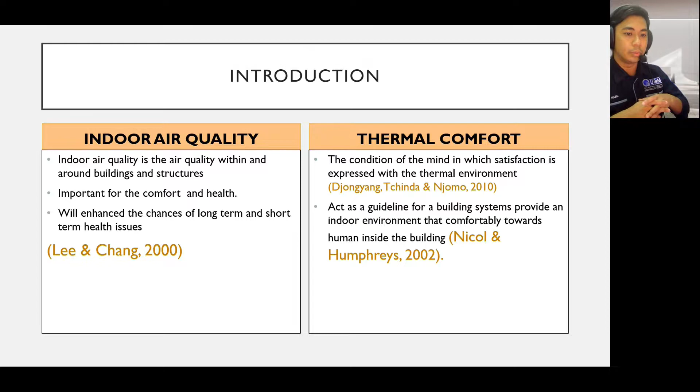The problem for the study is many researchers found that most people spend 90% of their time indoors. The World Health Organization, WHO, found that 3.8 million people die annually from illness attributable to indoor air pollution.

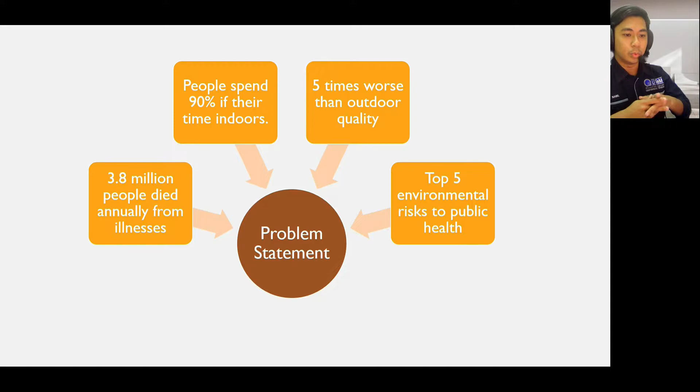The Environmental Protection Agency, EPA, also states that the levels of indoor air pollutants are often 2 to 5 times higher than outdoor levels, and in some cases can exceed 100 times the outdoor level of the same pollutant, and ranks indoor air quality as one of the top 5 environmental risks to public health.

These are the objectives for this research. The main objective for this study is to determine the indoor air pollutant concentration in lecturer rooms at the FTKMP building based on ICOP 2010, Industry Code of Practice on Indoor Air Quality 2010.

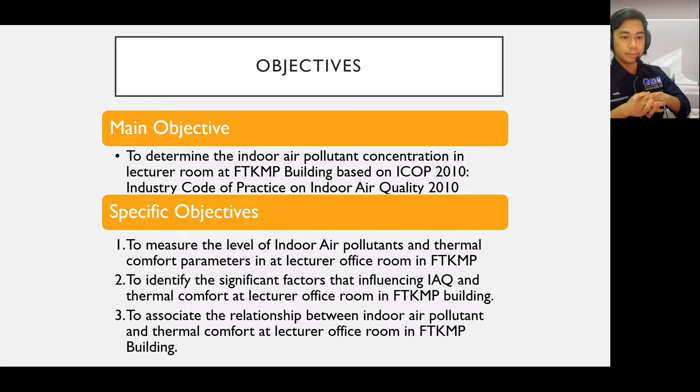The specific objectives are to measure the level of indoor air pollutants and thermal comfort parameters at lecturer office rooms in the FTKMP building. The second objective is to identify the significant factors influencing indoor air quality and thermal comfort at lecturer office rooms in the FTKMP building. And the last objective is to associate the relationship between indoor air pollutants and thermal comfort at lecturer office rooms in the FTKMP building.

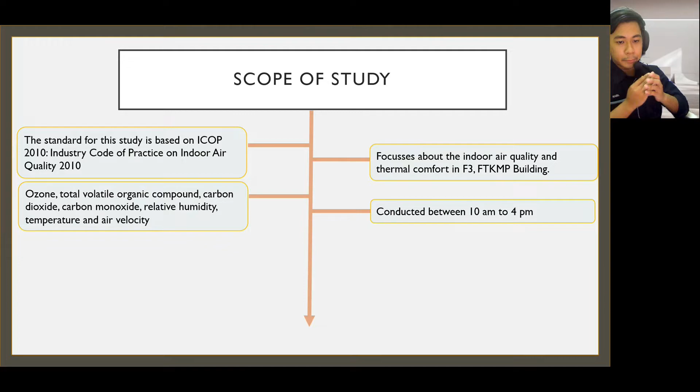The next one is the scope of this research. This study will only use standards based on ICOP 2010. This study only focuses on indoor air quality and thermal comfort in Factory 3 FTKMP building. The data parameters obtained are ozone, total volatile organic compound, carbon dioxide, carbon monoxide, relative humidity, temperature and air velocity.

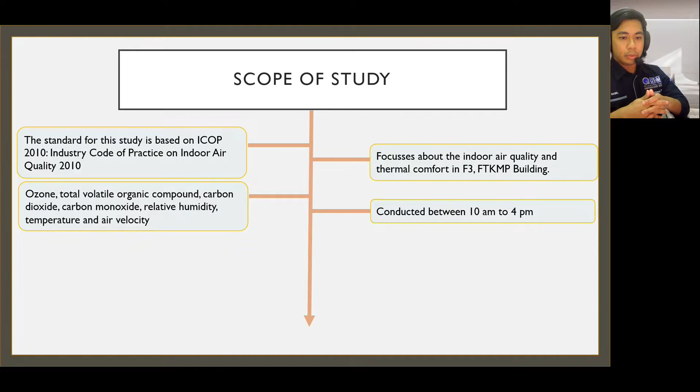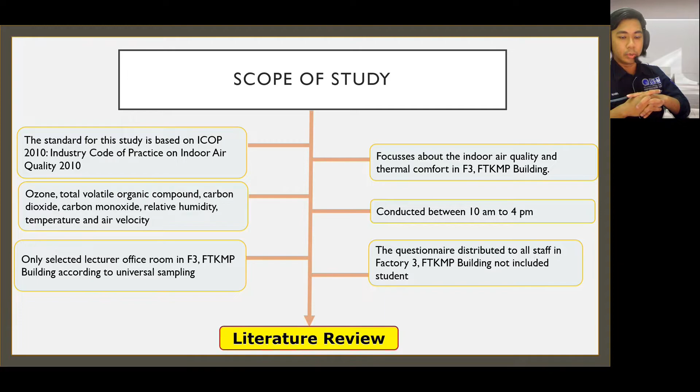The study will be conducted between 10 a.m. to 4 p.m. Only selected lecturer office rooms in Factory 3 FTKMP building will be measured for indoor air quality according to the universal sampling. The questionnaire is only distributed to all staff in Factory 3 FTKMP building, not including students.

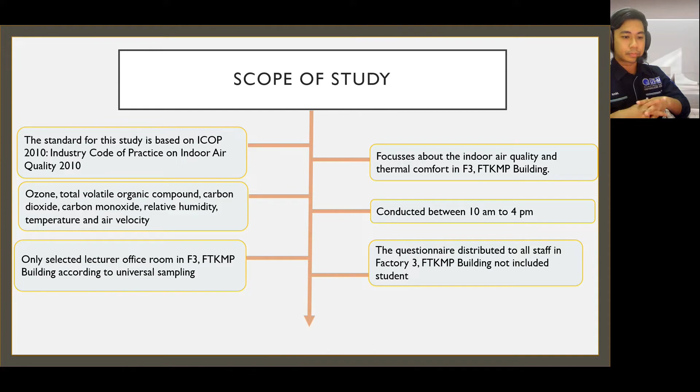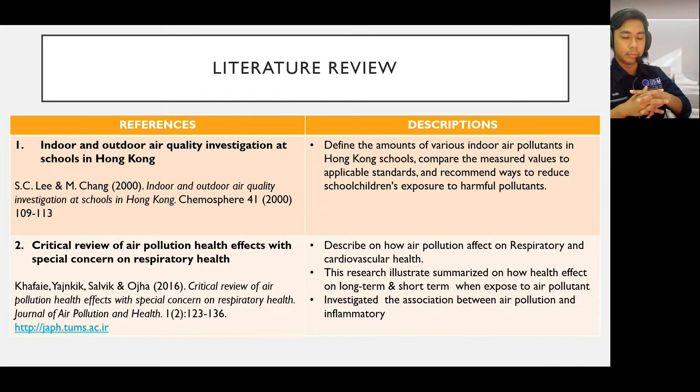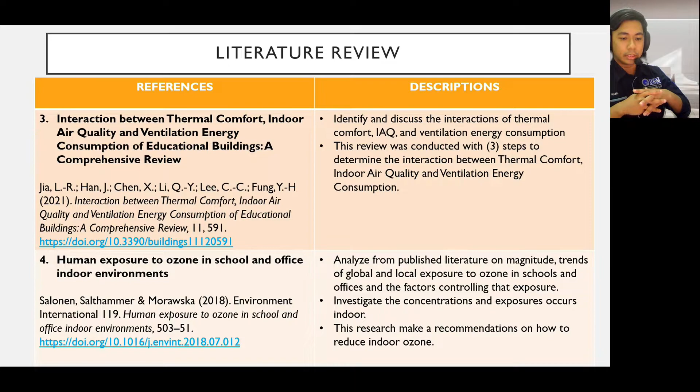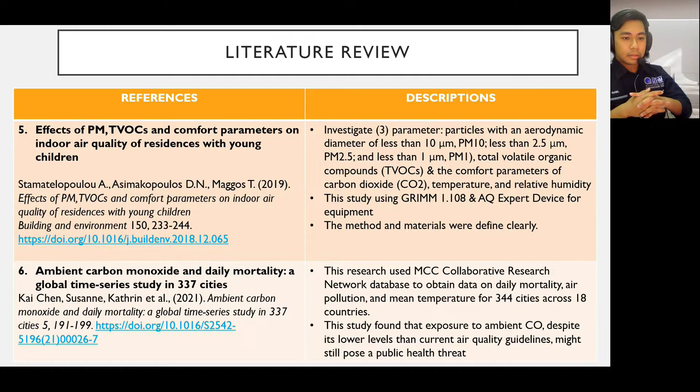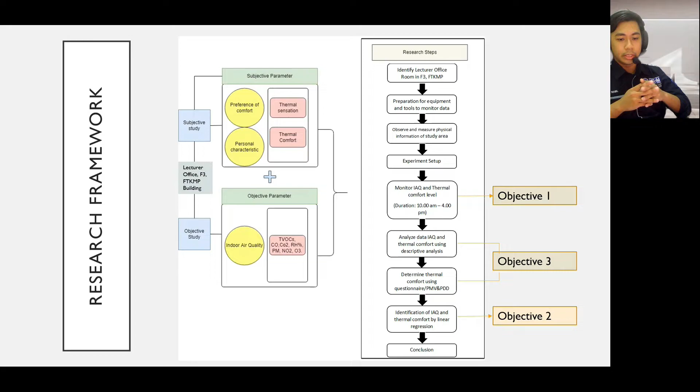After finishing the monitoring and collecting the data, indoor air quality and thermal comfort will be analyzed by using descriptive analysis. Then the questionnaire will be distributed to staff and the thermal comfort level calculated by using the predicted mean vote and predicted percentage of dissatisfied. Finally, the indoor air quality and thermal comfort will be analyzed using linear regression to identify the significant factors influencing the indoor air quality.

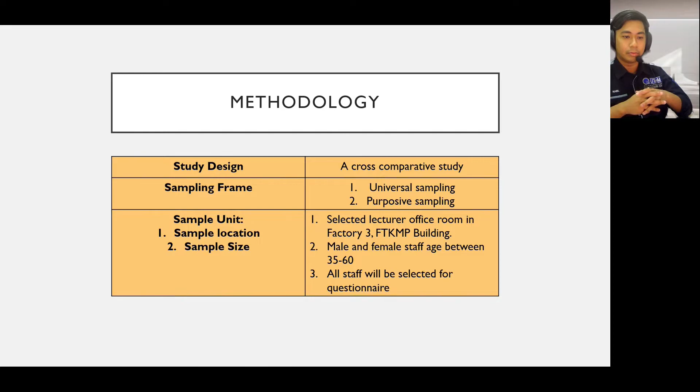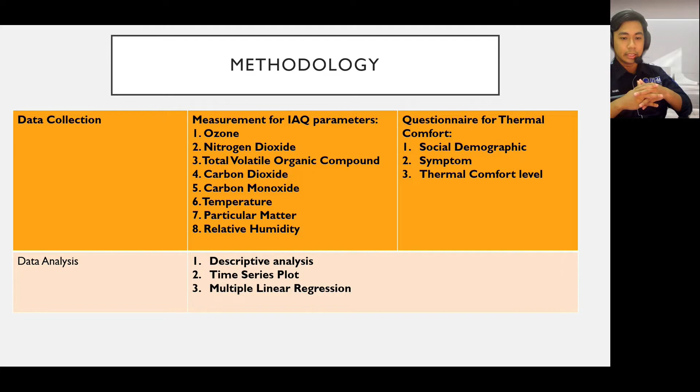The data collected for this study are the measurements for indoor air quality parameters, which are ozone, nitrogen dioxide, total volatile organic compounds, carbon monoxide, carbon dioxide, temperature, particulate matter and relative humidity. And also the questionnaire for thermal comfort to identify the sociodemographics, symptoms and the thermal comfort level. The findings will be analyzed by using descriptive analysis, time series plots and multiple linear regression.

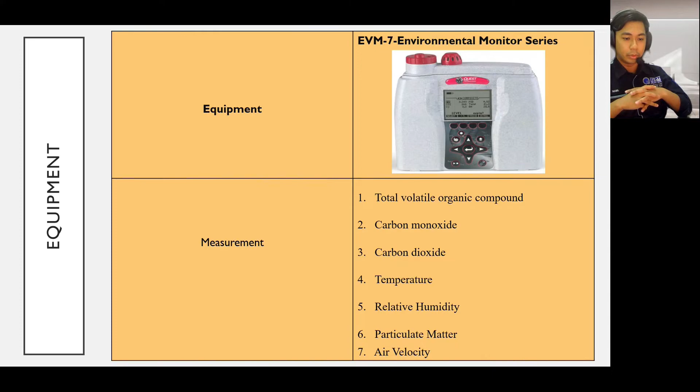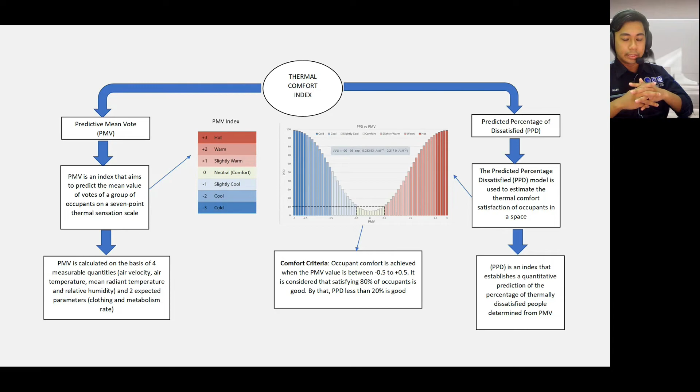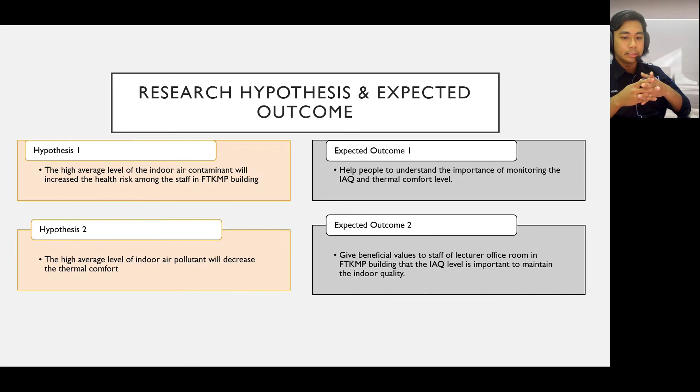Then the hypothesis and research outcome for the study. The hypothesis is that a high average level of indoor air contaminants will increase the health risk among the staff in FTKMP building, and a high average level of indoor air pollutants will decrease thermal comfort. The expected result is to help people understand the importance of monitoring indoor air quality and thermal comfort level, and also give beneficial value to staff of lecturer office rooms in FTKMP building that it is important to maintain the indoor air quality.

Finally, my future work and the conclusion for this study. I will proceed to distribute the questionnaire to staff in Factory 3 FTKMP building for evaluating thermal comfort. The indoor air quality in lecturer office rooms at Factory 3 FTKMP building will also be measured and analyzed accordingly using the equipment. Then, the significant factors influencing the indoor air quality and thermal comfort in lecturer office rooms at Factory 3 FTKMP building will be identified.

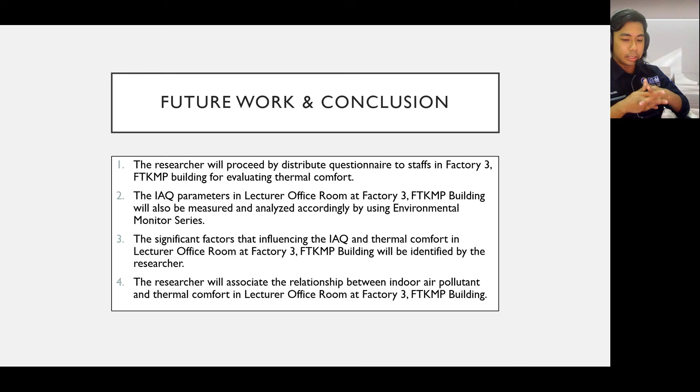Last but not least, the researcher will associate the relationship between indoor air pollutants and thermal comfort in lecturer rooms at Factory 3 FTKMP building. So that's all for the presentation.